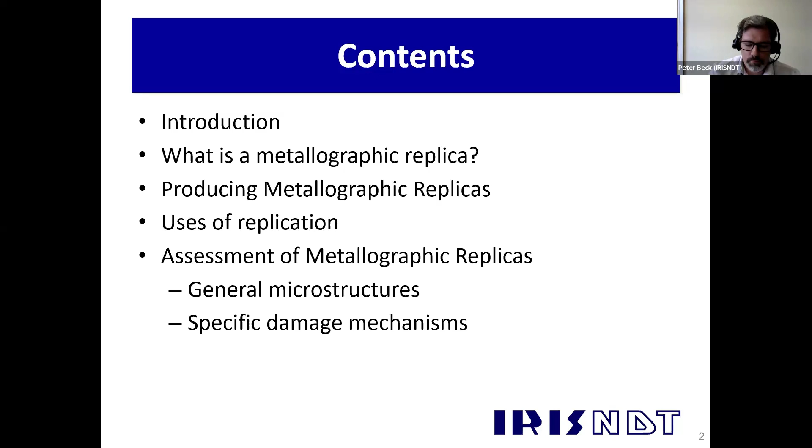So just a little background about IRISNDT. It's a Canadian company, originally started in the 1950s. It's grown through targeted acquisitions and also natural growth. So we've now got operations in the UK, USA, Canada, and Australia. We've got about 6 sites in the UK. Globally, we employ about 2,000 people, and I think there's about 41 locations worldwide. So the UK is probably the third largest area for IRIS.

So slightly confusingly, given the title of the company, we don't just do non-destructive testing, we also do destructive testing, typically in our lab in Derby. Our offering of services ranges from traditional NDT, so ultrasonic testing and MPI. We also do advanced testing, like phased array and RVI, remote visual inspections. We also offer metallurgy on site, so that's typically the replication we're going to talk about, in situ hardness testing and positive material identification, sort of chemical analysis. Those three tests generally go hand in hand, so although we're talking about replication, quite often we would do those three sort of tests together. We also do metallurgy in our lab, and we have a mechanical test suite, so we can do everything from tensile testing, hardness testing, and all of that supports the failure analysis we do.

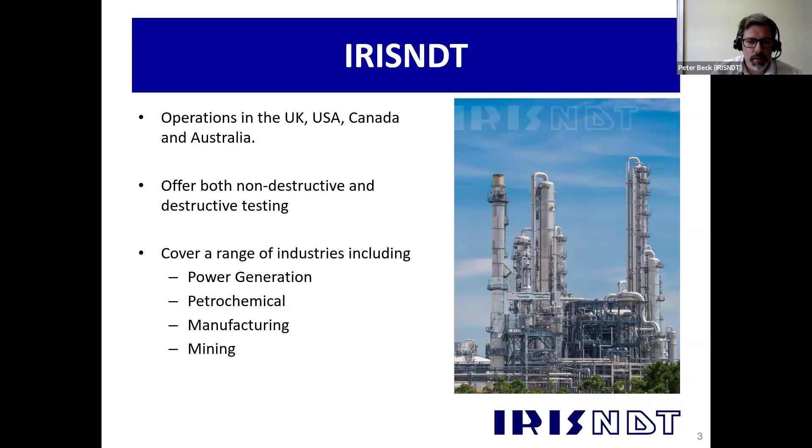We cover a wide range of industries. You've possibly noticed that both Simon and myself have a main focus on the power sector, but we typically also cover petrochemicals, manufacturing, mining, and many other industries, particularly with replication and failure analysis. It covers pretty much anything really, so we do cover other things.

So let's get to what a replica actually is. Essentially it's a fingerprint of the metal surface. By that, I mean you are essentially taking what's on the metal surface and replicating that onto another medium. Typically, there's two forms of replica that we use. One is an acetate sheet, which you can see in the bottom image, which is put onto the metal surface, and then we take that off and put it on a slide. I'll explain that in more detail in a minute.

And then there's another method, which is to use a putty type of material, basically a two-part PU rubber type material that mixes down a nozzle. Again, I'll go through that in more detail in a second. Both techniques have advantages and disadvantages. One thing they both can do is get down to about a micron in terms of resolution. So when I say a fingerprint, we're talking about an etched metal surface generally, and we would be looking at everything down to sort of carbides and phases and things like that.

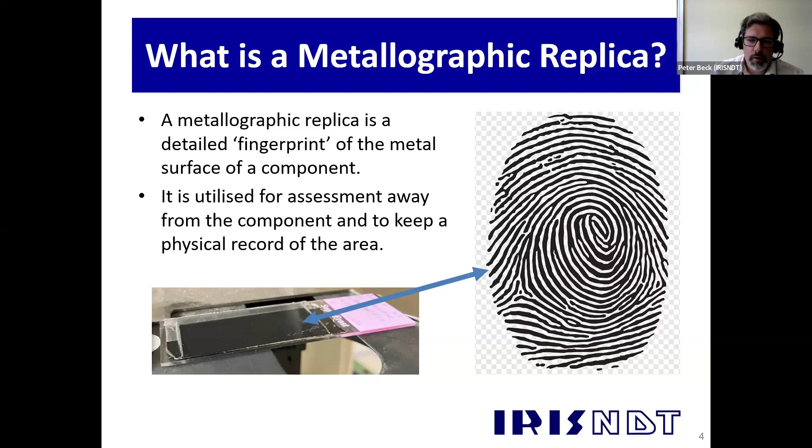So I'm going to go to the next slide now, which is talking about the PU type of replicas. As you can see, on the left image you have a small applicator, similar possibly to a silicon tube, silicone like you might use in your bathroom. It's a two-part system though, so as you press the plunger, both parts are pushed through the nozzle and they mix in the nozzle. So you have an activator and a hardener.

As it goes onto the surface, it will take up the morphology of the surface and gradually cure. You can get different cure rates, anything from maybe 5 minutes to about an hour. So you may think you want a quick cure time, but not necessarily, because once you've started the process, anything in that nozzle will start to try and cure.

If you've got a few components that you want to replicate, you would typically want something that cured over quite a long time, so that you had a long time to do your work. You'd get quite a few replicas out of one tube.

This type of replication is particularly good for any 3D type of objects, as you can see with this cog. So if you had a crack at the base of one of those roots, you'd be able to take the inverse image of that crack, assess it, and store it indefinitely really.

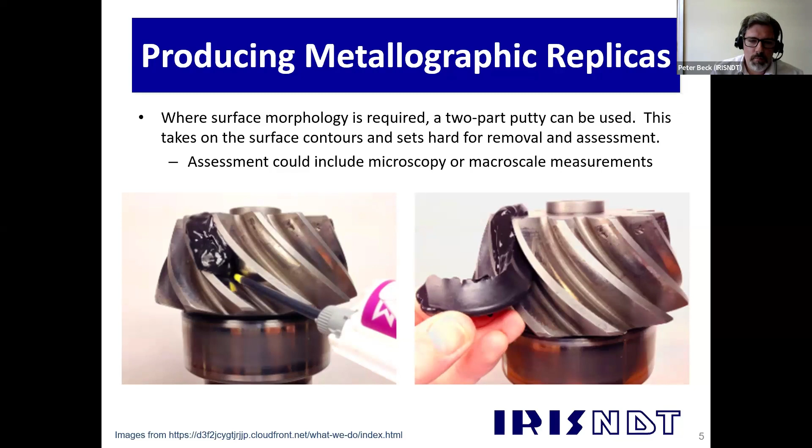So that's one method of replication. The one that we typically use is this one with the acetate sheet. The way we would generally do this is we would prepare the metal surface, polish it to 1 micron finish, and etch the surface.

Obviously that would depend on what type of steel, stainless steel, aluminium, any metal we can etch really, so the etchants will depend on the metal itself. But then we would apply this acetate sheet, gradually laying it onto the metal whilst also applying acetone.

The acetone has the effect of almost melting the acetate sheet, and this allows it to form the surface of the metal, if you like. At this point, the acetate sheet will then gradually harden as the acetone dries off.

You can see on this pipe that we've sprayed it black, and the replica is also black. The reason for spraying it black is to give us a contrast when we look at it under the optical microscope.

One thing to say is that we typically do replication for creep assessments, so typically with that we would look to replicate both toes of a weld. You can see in this image we've replicated 3 positions, one on one toe and then 2 positions on the other. That's because we've got a crack there that we actually replicated the crack tips.

Once this is flattened, that allows you to put it under an optical microscope. So we're taking something that is a curved or undulating surface and basically making it flat for assessment. That's the real key reason we would use this method. The PU method would also give us the same resolution, but not the flat surface, so it would be very difficult to focus and assess a replica from that method.

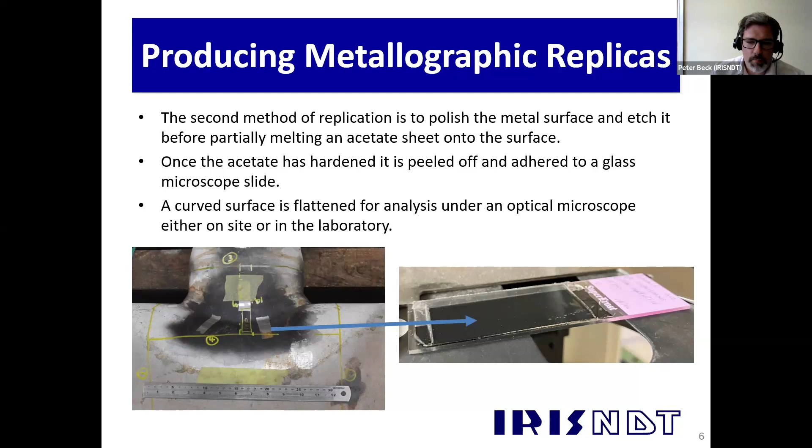So this is the kind of thing that we can see from a replica. We would typically look at replicas using magnifications between about 50 and 500 times magnification. The image you can see at the bottom is taken at 500 times magnification, and you can see that's pretty similar to if we looked at an actual metal surface.

We do get some imperfections from this technique. Mainly you can see this kind of white speckled appearance in some of the pearlite regions, and that's an artifact of the technique itself.

Obviously on different sites the cleanliness can be difficult to maintain, so replicas can sometimes get dust, scratches, or other debris stuck to them. It's important to try and maintain cleanliness whilst doing this, but generally we get something that's about as accessible as the metal surface would be.

The key thing is this provides a physical record of that component at that particular moment in time. So if you wanted to go back and compare it, you could at the next outage and compare the replica from the last outage if needed. Sometimes assessments can be slightly subjective, so one person's idea might differ from another's, so it's very useful to have that physical record you can reassess if needed.

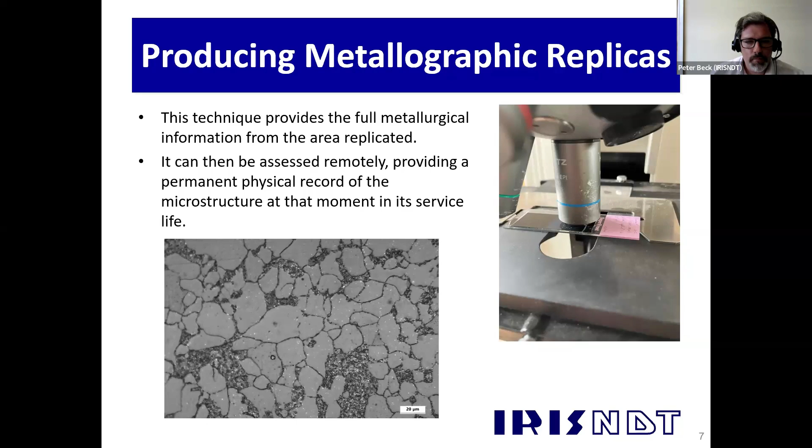I suppose the key thing is to know when to use replication. There are times when it makes more sense to replicate than others. We typically use this as part of an inspection monitoring system. So as part of an outage on a plant - doesn't have to be a power station - they would generally assess which welds might need replicating.

It might not actually just be welds. Sometimes they also look at parent material. Some bends and other components can be subject to degradation, and as plant gets older, you typically also look at the straight sections of pipe as well. So you can either just look at it as a general inspection strategy.

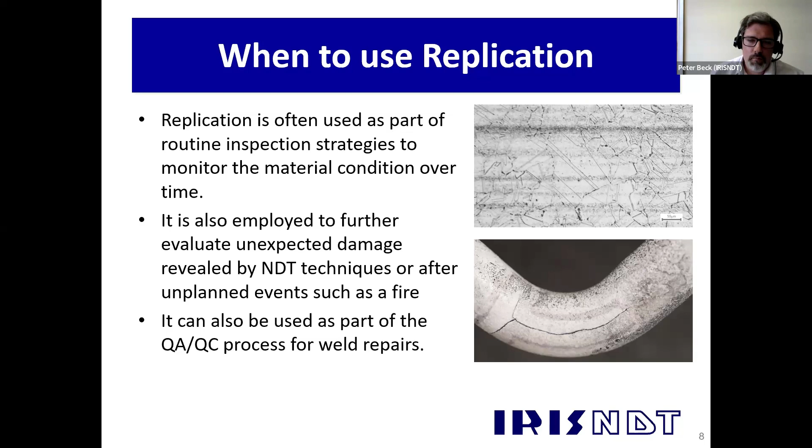Another thing that can be done is replicating any kind of welds or repairs in plant, or even before it's been in service. Quite often with stainless steels, we might be interested in sigma phase or something like that that's formed. So that's where that kind of QA process would come in.

I suppose it's important to compare replication to assessing a component directly. In an ideal world you would always assess a component directly, but generally it's not practical - sometimes the geometry of the component just isn't suitable for that. You can see one of our replicators here polishing a bend. Once he's polished that and it's completely etched, in theory you could try and put a microscope onto that pipe and assess it.

The problems are, obviously it's curved, so in two dimensions as well, focusing would be very, very difficult. Also just holding the microscope in that position, and there doesn't look to be a great deal of access there. The microscope has a certain length to look down, so there may not actually be enough space to see down the microscope at that point. We're also often working off scaffolds and in very small areas, so just getting there to take a microscope often wouldn't even be practical, just in terms of logistics.

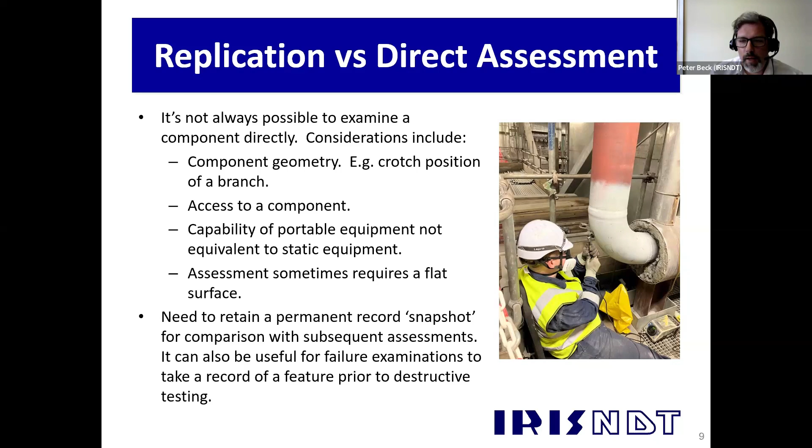One thing is it can be used on failed components. I appreciate they're not in service anymore, but sometimes when we're doing a failure assessment, before we cut something up, we might replicate the original surface so we've got a record of it, so that as we cut up, we can still compare what the actual surface was like.

So there are some limitations to replication. Firstly, there are some features of the metal that aren't transferred into the replica. These are typically things like the color of the etch. So sometimes if you're looking for sigma phase, for example, ideally you would use a colored etch so that it etches the sigma a kind of browny color.

One thing is that with this, it's not got any color. It's always going to be black and white, basically. So that is a limitation. So you'd have to make some allowances. Sometimes it might be that you'd have to say it's consistent with, but it's not definite.

The chemical composition obviously isn't transferred. It's an acetate replica, it's not the metal itself. For that, we would use positive material identification. So you can see in the top image we have an XRF gun, so X-rays are fired at the material. The returning X-rays are assessed to identify the different elements in it. Typically this is for steels and stainless steels. Other materials can be done, but we typically stick to steels and stainless steels.

And then lastly, the mechanical properties of the material - again obviously it's an acetate replica so they're not transferred. So this is where we'd use portable hardness testing. The bottom image there is of a UCI type hardness tester, which gives essentially like a Vickers hardness equivalent to about HV5. From that we can get most of the information from a material to support the replication technique.

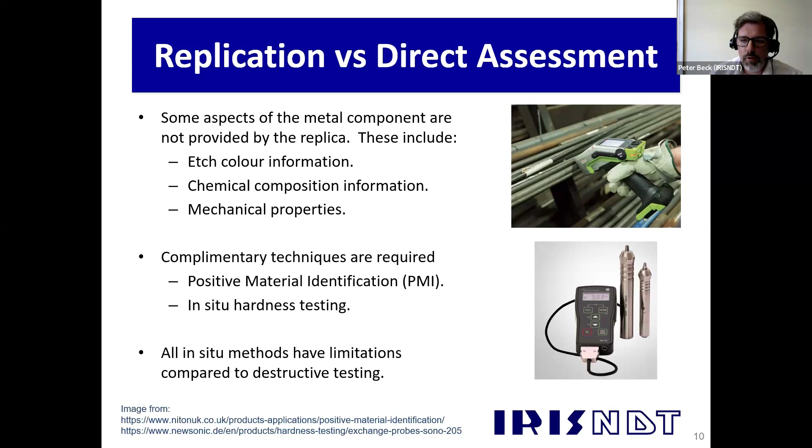I suppose all portable equipment has considerable limitations compared to static equipment, and in an ideal world we'd do destructive testing, so we would do a proper tensile test and things like that. These techniques will always have much greater uncertainties, so you'd have to already have some idea of what the material is that you're testing. Then it's more about saying yes, this is the correct material properties, and they match to the grade that you expect.

So this is one of the uses we've had recently on replication. We had these boiler tubes that had a heat tint on, so they're a stainless steel. Obviously this heat tint indicates they've probably been up between 500-600 degrees. So the customer's concerned whether there was any degradation, whether they may be sensitized. Sensitization is carbides forming at grain boundaries, essentially. Potentially you could also get sigma phase forming at these temperatures, but it's probably on the low side for it.

So this is one of the key things for replication, is fitness for continued service. We would typically look at things like, is it susceptible to corrosion? Has it degraded in a way that will make it susceptible to corrosion? Any kind of metallurgical degradation in the microstructure that might be mechanical or corrosion sensitive - has it softened, things like that.

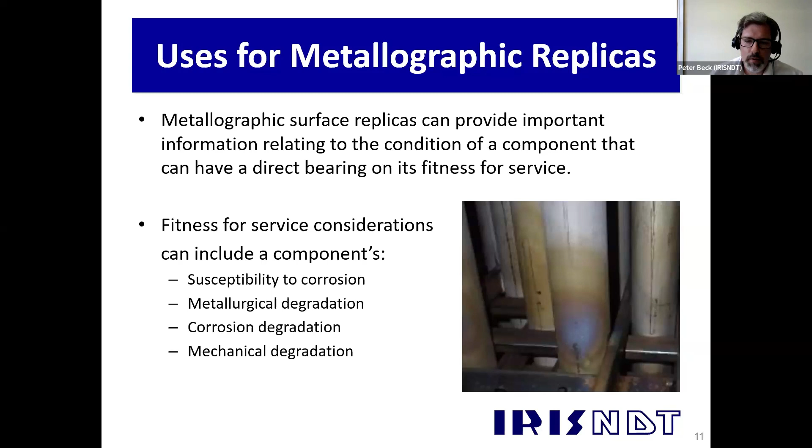Has there actually been any corrosion on the piece? I mean, obviously this is an oxide, the heat tint, very thin, but sometimes we could potentially be looking at corrosion on a plant. We could also be looking at mechanical damage, so things like fatigue or creep damage would come into those categories. So in terms of what replication can offer an assessment engineer...

The condition of materials can be affected by a lot of factors. I'll start on the right-hand side of this diagram - these are the key things we're looking for, typically creep damage, which can be affected by a number of factors. Things like manufacturing defects - in that I include things like casting defects or original tube bending or anything like that, as well as welding and thermal inputs.

Typically we're looking at power station components, so steam pipe work, things like that that are hot. Mechanical stresses, again this would come from your pressure, the hoop stress on the steam pipe work, but also can be mechanical inputs from any out of alignment of pipe work. The system design itself can have an impact, and then also how long the plant's been in service for.

Similar things really for fatigue, and then same for corrosion fatigue, and then I suppose corrosion would be affected by most of these really. Original defects, so any kind of casting defects might form voids and pits for sort of crevice corrosion, things like that. Thermal input, so if the component's hot, then obviously it's going to accelerate the corrosion.

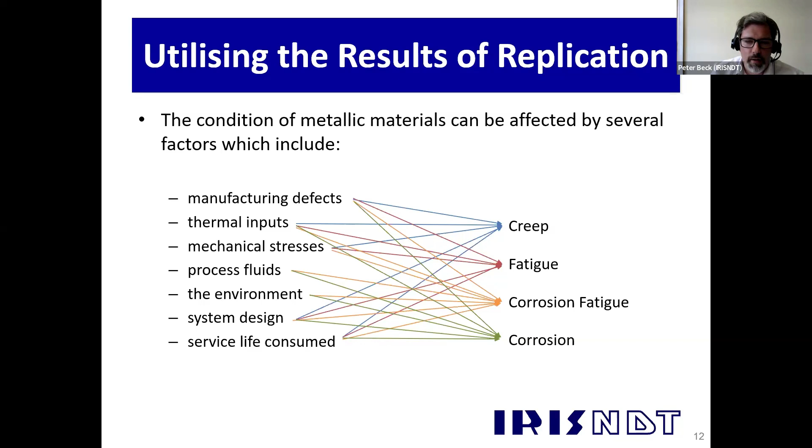In terms of assessment, the image on the left is typically the area that we're most interested in on a lot of the plant that we look at. It's got weld metal on the right, the heat affected zone in the middle, and then going into parent material. So we would typically assess an entire replica, looking at the weld, the parent material, and the HAZ, at about 50 times magnification.

Then we would focus on certain areas like the heat affected zone at maybe 500 times magnification, and we can go up to 1,000 if needs be. We would also, if we see any sort of volumetric defects when looking at the replica generally, look at those in more detail.

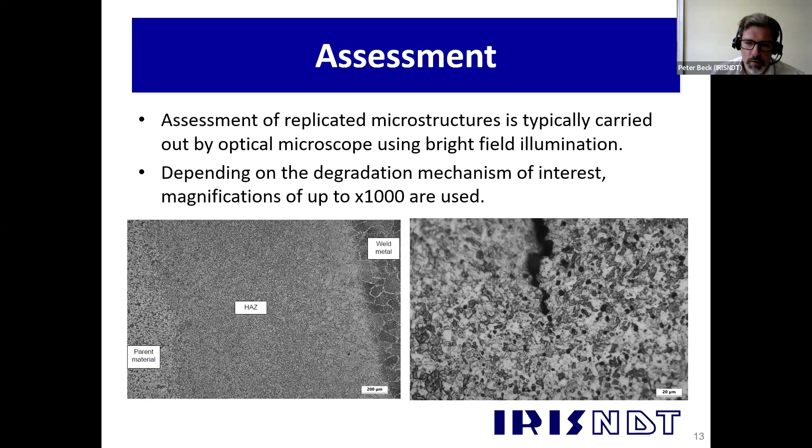On the image on the right, you can see the tip of a creep crack. This is creep damage when it's quite severe, surrounded by these creep cavities, again at 500 times magnification, where you can see individual cavities. Simon will go through creep damage in a minute, I think.

I don't know how much everyone knows about metallurgy, so I'll give a little background. Typically we're starting off with something heated up into the austenite range, and then if we go through a slow cooling process, if you're familiar with the carbon iron diagram, you'll get something like the left-hand side.

You'll get a two-phase microstructure for a steel, comprising the light-coloured grains, which are ferrite, and the dark-coloured grains, which typically would be pearlite. To be honest, in this image they're probably more like bainite, which is somewhere between slow and rapid cooling. But still, you've got that quite distinct two-phase microstructure.

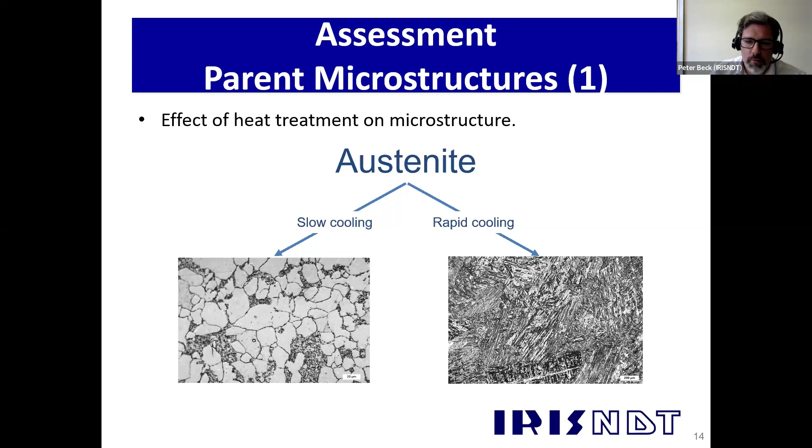The other option is rapid cooling, which stops the carbides from forming into these nice individual grains, and you get this sort of acicular structure, which we'd call martensite. So that's the effect of heat treatment on the microstructure of a metal.

The actual composition can also have a significant effect. Taking two extreme examples, one would be cast iron. These top two images show on the left spheroidal or nodular graphite cast iron, and on the right a grey flake cast iron. Both of these would be termed cast iron, but the real key difference is the alloying composition.

The bottom images show stainless steels, again different only by their compositions really. On the left, we've got a super duplex stainless steel - you can see the light phase is austenite, and the darker phase is ferrite, so it's a two-phase structure there.

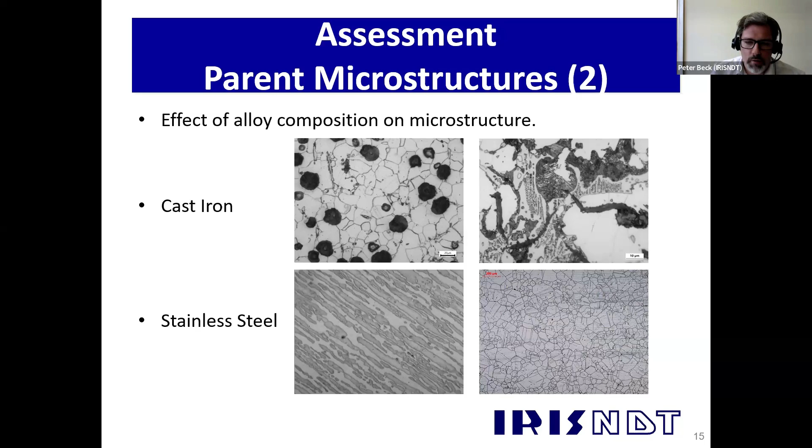Whereas on the right, we've got an austenitic stainless steel, so it's a single phase austenite there. You can see the grain boundaries, and you can probably also see some twin grain boundaries. So these are the kind of microstructures that we can assess in replicas, and comment on the quality of the microstructure, any degradation, things like that.

We can also look at casting defects as one example. One issue may be that if you have a defect like this on the surface, it could be indicative of porosity throughout the casting. That could give you leak sites through the wall thickness, or it could act as sites for corrosion to initiate. This is an aluminium casting that we had.

From a dye penetrant inspection, we initially detected the pores, though they're quite difficult to see by the naked eye. So I've actually included an electron image of the actual defect. We were lucky with this that it was actually a failed part, so we were able to cut it up.

So this is an electron image of the actual part. You can see this pore, and you can actually just about make out the dendritic structure around where it's solidified. So it's basically a shrinkage porosity there.

The middle image shows a microstructure at low magnification, giving us a chance to understand the porosity and the extent of it. Then we've looked at the higher magnification image, which has given us an understanding of why this porosity might have existed. These needle-like phases in the microstructure can tend to slow the metal flow as it solidifies, and that can cause these kind of shrinkage porosities.

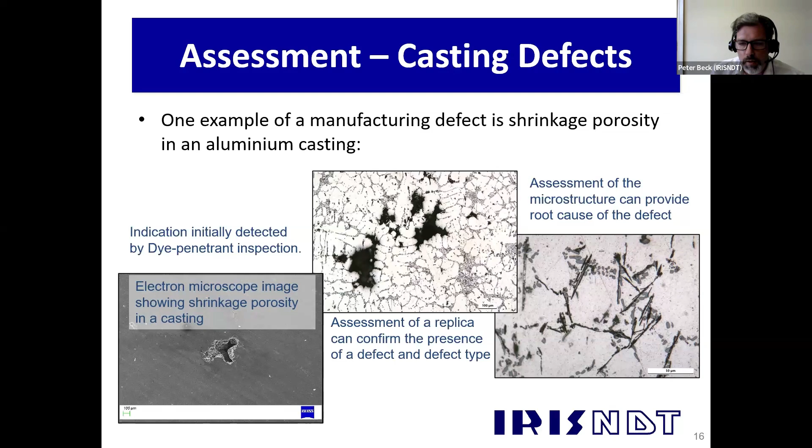So all of that is something that we can cover with replication. We replicate the surface, and we would be able to see these kinds of defects and features.

Another thing that we can do is look for deleterious microstructures. Typically with stainless steels, one consideration is sensitization. So we can actually etch the structure very heavily and see if we get this kind of ditched structure, as they call it. That's the image on the left, showing a sensitized austenitic stainless steel.

In super duplex steels, we typically look for things like sigma phase. It can be an issue with austenitics, but more so with duplex steels. So we can replicate for that and look for it, and we can also look at the phase balance between the austenite and the ferrite in super duplex steels. That's what this image on the right is showing, a super duplex stainless steel.

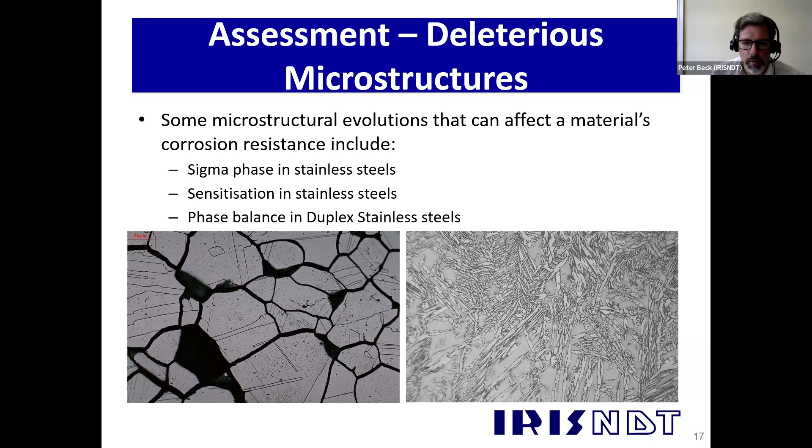You would put a grid pattern across that and do a count basically to work out the percentage of austenite and ferrite, and that has quite a key impact on your corrosion resistance, the amount of austenite giving you that corrosion resistance.

In terms of corrosion specifically, we can use replicas to assess a number of mechanisms, potentially pitting corrosion. As I said, we probably use the putty type replica method for that. You'd then be able to physically measure things as well as do some optical microscopy. It would be limited due to the irregular surface, but we could do some.

We'd also look at stress corrosion cracking. That's this image on the left at the bottom, showing the transgranular cracking that you typically get with stress corrosion cracking in austenitic stainless steels.

We can also look at corrosion fatigue, similarly. You typically look at the crack tips and look for oxides and things like that, which would show up as a sort of grey amorphous kind of region in the replicas.

And then this bottom image is showing hydrogen cracking. This is a putty type replica, so you can actually see the intergranular cracking. You've got the crystalline structure there of how the hydrogen has gone around the grains.

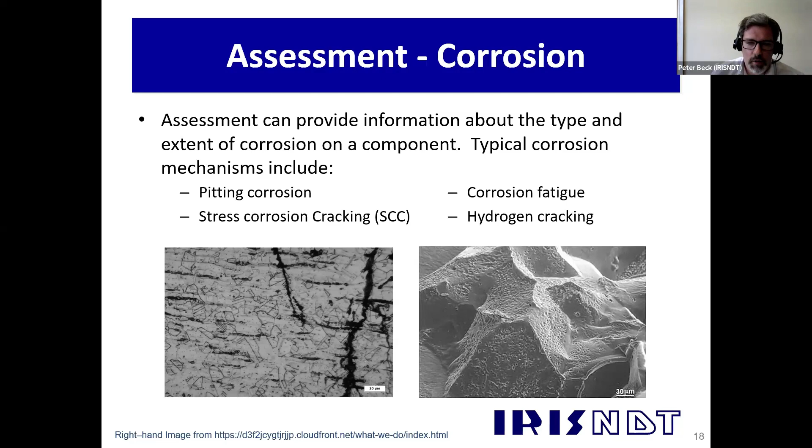So I think this is Simon's slides. Right, thank you, Pete. Can you hear me okay? Yeah, yeah.

As Pete said already, probably the most common application of the acetate replica in the power industry is to monitor for creep damage. Just to give you an indication of the scale of the replica exercises we undertake, if we embark on an outage, a statutory outage for a gas-fired site in the UK that has pipe work in the creep range, we could be taking up to 1,000 replicas or more during a 3 to 4 week period.

So it's quite labour intensive. We have a team of replicators to do that, and obviously people looking down the microscope. So it's replication on an industrial scale, really.

Just to remind you what creep is, it's a process of slow elongation of a steel. This is a metal that's loaded below the yield stress, but over time there's a time-dependent process that takes place to give you deformation. This can occur when the operating temperature of a component is at about 30 to 40% of the melting point, measured in Kelvin.

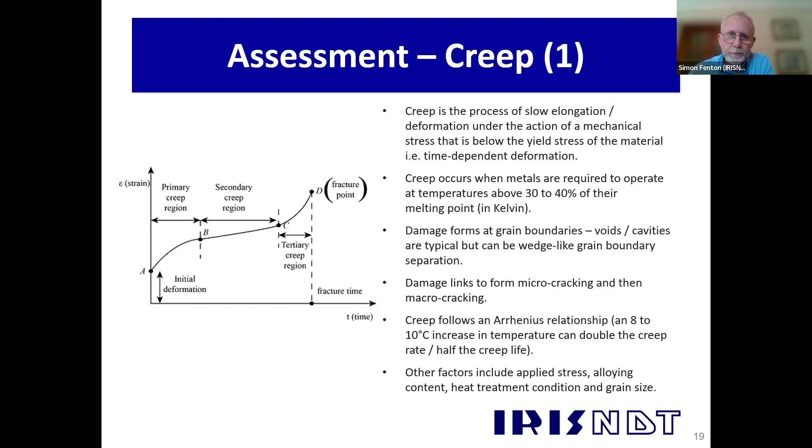Next slide, please, Pete.

So this is another view of that creep curve showing this progression of damage. In the bottom left there, you've got isolated cavities forming on the grain boundaries, in this out of the secondary stage into the tertiary stage. Those cavities are then starting to align themselves on the boundaries, eventually forming micro cracks and then joining to form macro cracks.

It's only at that macro cracking stage that we can use conventional NDT to find these cracks, this damage. Up to macro cracking, we need surface replication to find the damage.

But we always use a range of things in our toolbox when we're looking for creep. So it's surface replicas, but MPI and UT are very important for us. MPI, magnetic particle inspection, allows us to cover the whole component. We would typically carry out the MPI before we do the replicas, so that we can target the replicas on any defects that are shown up by the MPI.

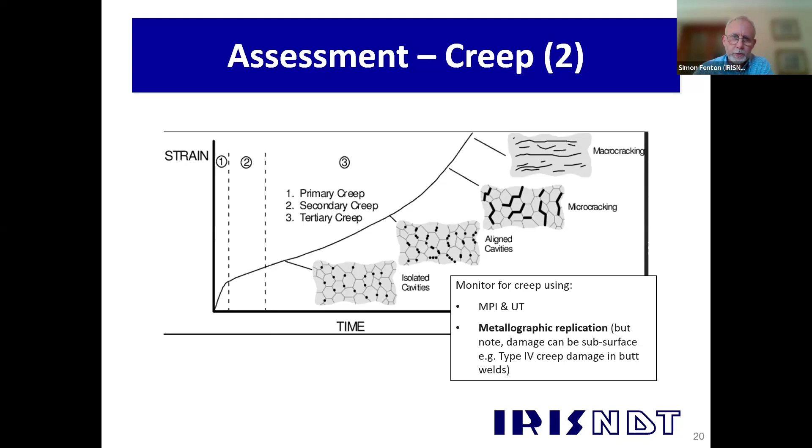UT, ultrasonic testing, is also really important because sometimes the creep damage can develop subsurface, so you're not always guaranteed to find the peak levels of creep damage at the surface. This is true of things like butt welds and thick section components. So ultrasonic testing is also used as a key monitoring tool alongside replicas. Okay, next slide, please, Pete.

So in terms of parent material, this shows something we don't want to see, obviously. This is a 600 millimeter long creep crack in a main steam pipework bend on a UK coal-fired site. The site's now closed. This was discovered in 2006. The plant had been in operation for about 200,000 hours, operating at 565 degrees C. So it's a low alloy steel, 0.5% chrome, half moly, quarter vanadium. The design life was 150,000 hours, so it's well past its design life.

But at the time, we were monitoring 1 or 2 bends on that power station each outage, every 4 years, with replicas and NDT. And the discovery of this in 2006 led to a massive escalation in the amount of replicas we were putting onto parent material. We were already looking at lots of butt welds, because they were known to suffer damage earlier in life. But the parent material, until this stage, had not really given us any problems. So there was suddenly an overnight need to train up new replicators, and again, it became replica on an industrial scale, really, to monitor this damage.

And in this particular example, the creep crack that you can see on the outside actually started as global creep through the body of the component. The component was 65 millimeters thick. But in the latter stages, it grew very rapidly by a process of creep crack growth. So this is creep damage sweeping away at the crack tip and forming a very rapid progression of the creep crack.

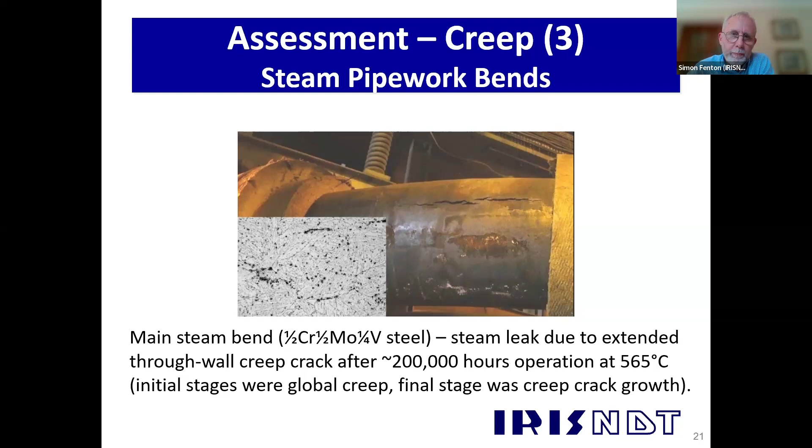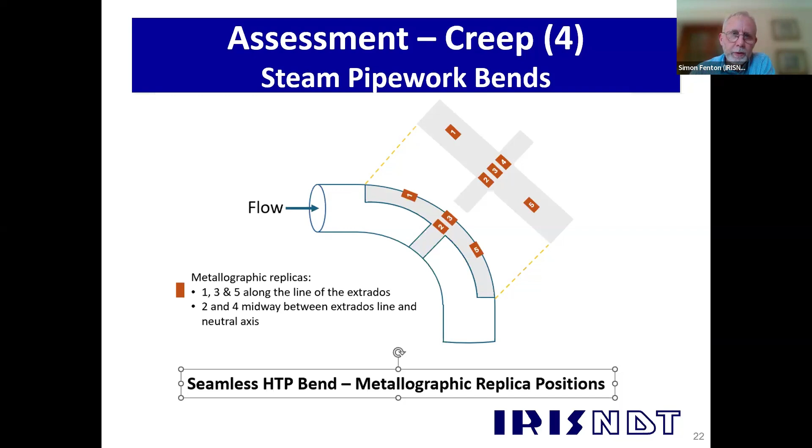This slide is applicable to a seamless bend. In the UK we also have examples of bends that have been seam welded, sometimes with multiple seam welds, one on the intrados, one on the extrados. That gives a requirement to throw more replicas at the inspection, so we could be looking at up to 15 to 20 replicas per bend. It's a lot of effort to monitor for creep damage.

Typically in the coarse-grained heat affected zone we get things like reheat cracks you might have heard of. But my focus for this presentation is on the fine-grained heat affected zone, also known as the Type 4 region. The Type 4 region is a particularly creep weak zone.

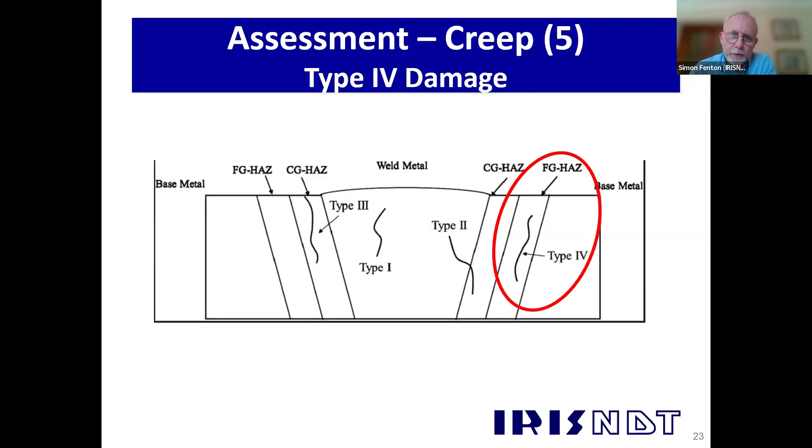Not only is it called Type 4 damage, we also call that region the creep weak zone, the over-tempered region, the intercritical region, the fine-grained region. So it's got lots of different names, but it's the same thing: a creep weak region of the weld.

In that previous bend failure I showed you, similar systems had suffered weld failures after 40,000 hours. This was a combination of the creep weak zone, but also problems like pipework supports leading to high system loads, so high system stresses acting on that Type 4 region.

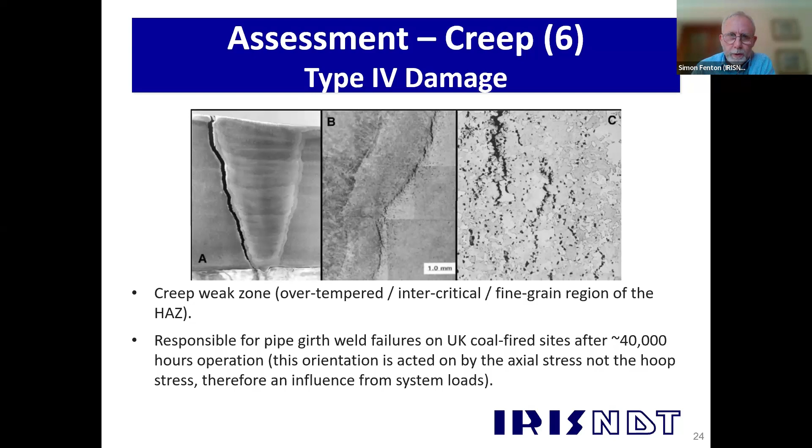That occurred after about 40,000 hours of operation at about 540 degrees C. The material is grade 91, P91, a modified 9 chrome steel. It's a particular steel that if you get the heat treatment wrong, you can suffer premature creep damage, so we're always quite wary of this material, using a lot of replication and NDT on circuits made from it. What we needed to know in this case was the damage mechanism. Looking at that macro crack, the possibilities are a reheat crack, a creep crack, or a fatigue crack. So we used metallographic replicas to determine what we were looking at.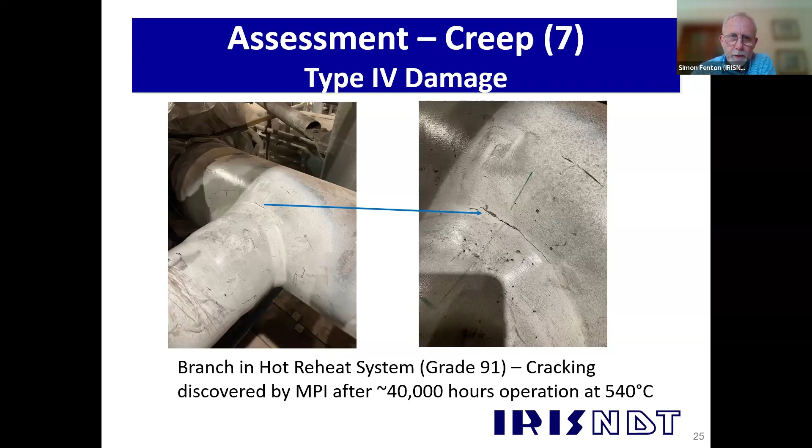Next slide please, Pete. So this is the same branch after we've taken that particular branch out of service. We weren't able to carry out a weld repair, because this was creep and the branch was so thin, it was about 10 millimeters in wall thickness. If we do a weld repair with this, we have to remove all the heat affected zone, so that would have opened out the excavation too wide, given the thickness. So in this particular case, we had to rip out that T and put a new branch in place.

I think Pete's used this slide already, actually, but it shows the positions of the replicas. There's two on the top of the branch there, but you can also see on the far left a replica was carried out on one of the butt welds as part of the routine condition monitoring on that system.

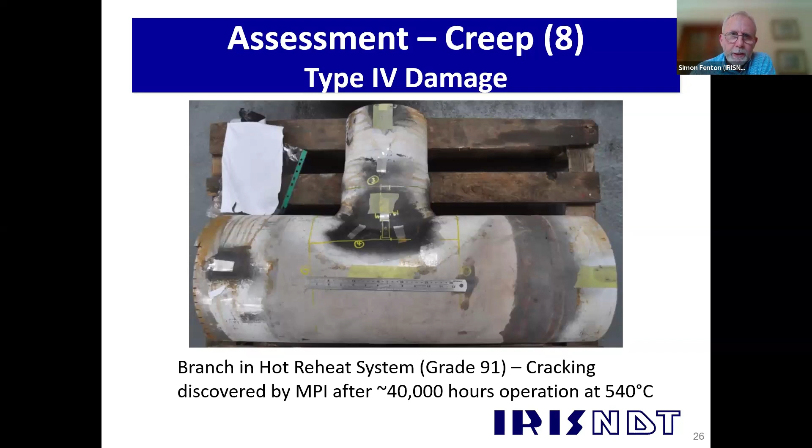Okay, next slide please, Pete. That's the result of the replica. So this is a times 500 magnification shot, acetate replica at the crack tip. You can see the micro crack there, but also to either side of the micro crack, you can see the little black dots in the martensitic microstructure. So those are creep cavities forming on the grain boundaries of the structure.

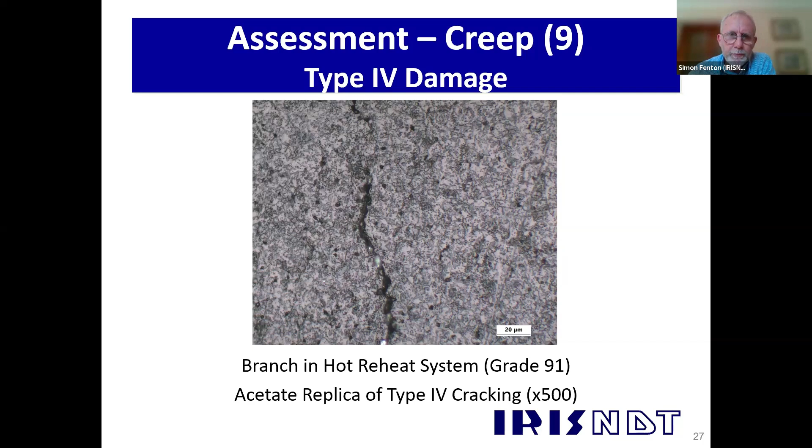Okay, next slide. So this is the final example that we've got. This is another recent case that we looked at where we were doing replicas on a once-through cooler branch weld. So a once-through cooler is a means of collecting or cooling air from a gas turbine compressor, cooling it before it's reused to cool the gas turbine blades. But in doing so, what we do is heat up water, convert it into superheated steam.

So this is one of the branches taking the feed water into this heat exchanger. We've moved from a carbon steel material on the branch using an Incoloy 800 transition piece. We welded that using Inconel weld to a Type 321 stainless steel shell. So there's quite a few different materials involved in this transition weld.

And you can see there that the etch that was carried out using Marble's reagent has formed this very dark line on the microstructure. So that dark line is on the heat affected zone, the fusion boundary between the Inconel weld and the Type 321 stainless.

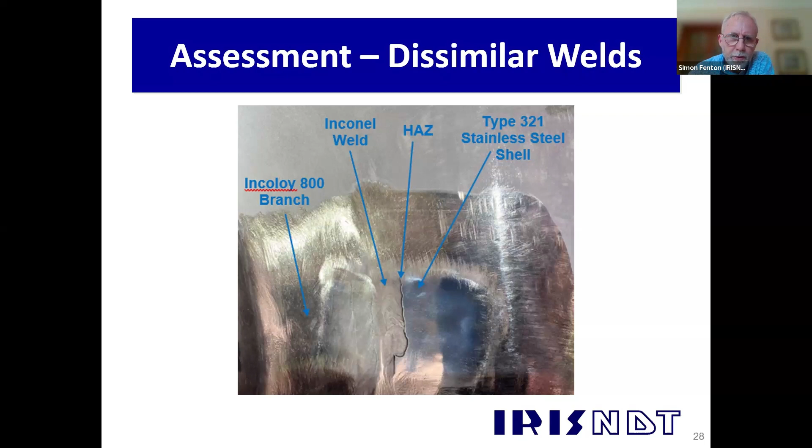And then on the next slide, Pete, in more detail at times 500, you can see that darkly etched region has actually got a substructure to it. So it looks like there's carbides in there, possibly. You can see the twins on the far right hand side. So there is a substructure to that.

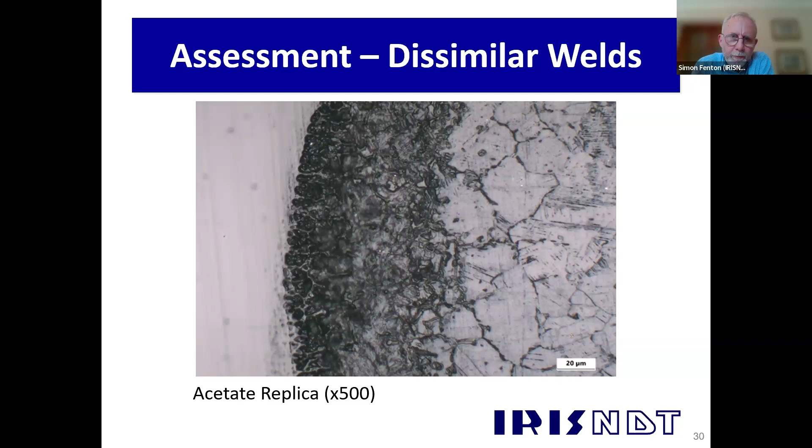But this does illustrate what Pete was saying earlier, in that there is a limitation to replicas. Next slide please, Pete, which is the same photograph. The possibilities here are really that we've got an etch effect because of the dissimilar materials causing this light etch, this dark etch, or we could have a region of carbon migration. But even using the PMI techniques, the X-ray fluorescence detectors that we can take to site, we're not able to investigate the carbon content across that heat affected zone.

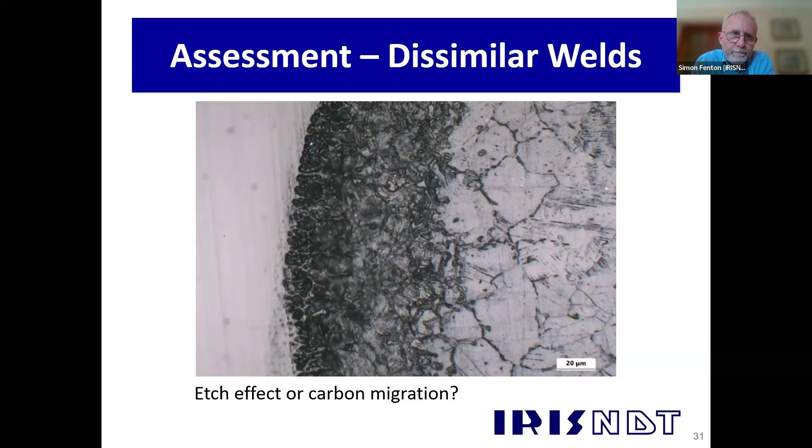So really the only way to solve this issue is to have a real sample of material back in something like a scanning electron microscope. So yeah, we're able to say something about what's going on with the microstructures and what we're seeing on that etch structure, but the replicas and the PMI technique didn't give us everything we needed for this investigation. And I think that's the last slide.